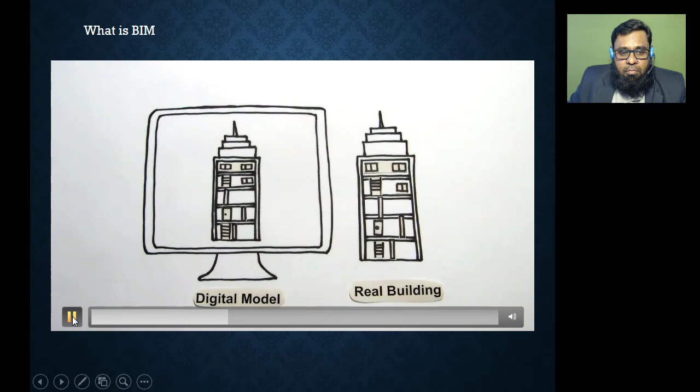The BIM model consists of the virtual equivalents of the actual building sections used to create a building. These intelligent elements are the digital prototype of the physical building elements such as walls, columns, windows, doors, stairs, etc., that allow us to simulate the building and understand its behavior before the actual construction begins. Now let's see what a BIM model can be useful for.

3D. So the first option in BIM is 3D visualization. It means if you are dealing with the BIM concept, we are working with a 3D intelligent component. Not just a 3D component, a 3D intelligent component, and that intelligent component can link with other components at the time of design.

Visualization. Of course, the most basic use of a BIM model is for creating realistic visualizations of the planned building. Your BIM model helps your design decisions by comparing various design alternatives and for selling your design to your client, the local community, and other stakeholders as well.

Change management. The next concept in BIM is change management. In BIM, we can say change anywhere will update everywhere. For example, in CAD software we are dealing with different types of drawings, and if you make any changes in the plan, they will not automatically update in the section. But when we are dealing with the BIM concept, for example using Revit MEP, because Revit works on the BIM concept, if we change anything in the plan, it will automatically update in all other views like section, elevation, etc. Why? Because we are working with 3D intelligent components, not drawings like AutoCAD.

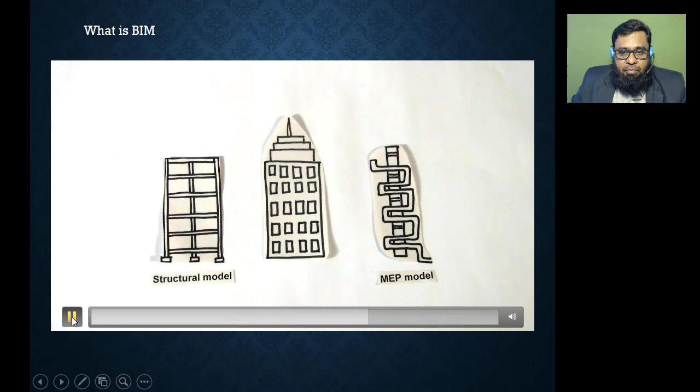Simulation. BIM models contain more than just architectural data. Information about the different engineering disciplines, sustainability information, and other characteristics can be easily simulated well in advance of actual construction.

Data management. The next option is data management, and this option is also very useful in the BIM concept and followed by Revit. For example, if you are doing a material takeoff using a CAD layout, we manually read the drawing and extract the number of diffusers, number of light fixtures, etc. But with BIM, for example using Revit, when we use any component in the project, you will find the entry in the database. Revit works on BIM, and BIM offers a single database, and that information can be extracted in the form of a schedule like an Excel program with 100% accuracy at the time of material takeoff. So this is also one very excellent option offered by BIM and followed by Revit.

BIM contains information that is not visually represented at all. Scheduling information, for example, clarifies the necessary manpower, coordination, and anything that might affect the outcome of the project schedule. Cost is also a part of BIM that allows us to see what the budget or estimated cost of a project might be at any given point in time during the project.

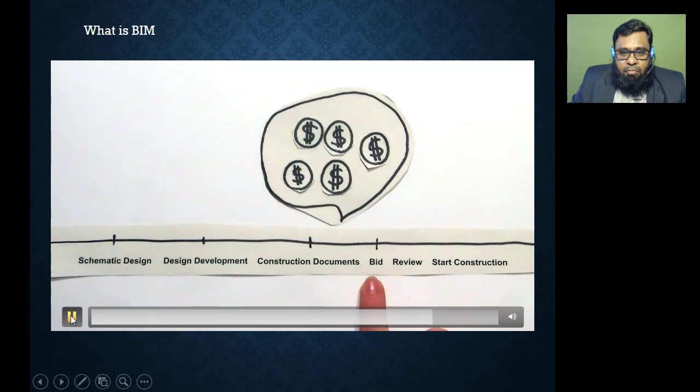Needless to say, the data put in a BIM model is not only useful during the design and construction phase of a building project, but can be used throughout the entire building life cycle, helping to reduce the operation and management costs. So BIM is not a concept just for design. BIM is a concept right from the design till the demolition of the project, including project maintenance, etc. So we can consider BIM a concept for the complete life cycle of the project, including the services.

So remember, BIM is not a software. BIM is a concept for the complete life cycle of the project, right from the design stage till the demolition of the project, including services. And Revit is a software from Autodesk that works on the BIM concept for designing, drawing, material takeoff, modeling, etc. So after learning the concept of BIM, now we are ready to discuss Revit.

As I said at the beginning, Revit is a software from Autodesk, and you all know about Autodesk. AutoCAD is from Autodesk, 3ds Max, a list of software. So this Revit MEP software is also from Autodesk and works on the BIM concept.

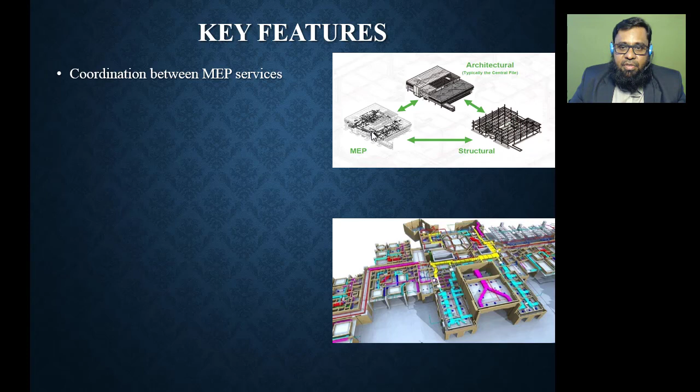Next we'll talk about the special features offered by Revit MEP software. The first is coordination between MEP services. Revit offers coordination between architectural, MEP services and structural, but here we are talking about MEP services. For example, if there is any change in the architectural design at the design stage, one can change the services as per the requirement, or vice versa.

Next, operation of the software is parametric. It means a change anywhere will update everywhere. For example, the equation Q = AV, with Q, the flow rate in the duct, kept constant: if you increase the velocity, automatically the duct size will reduce. So Revit works on a parametric engine. If you change one parameter, the values of related parameters update automatically. And this option is very useful for designing.

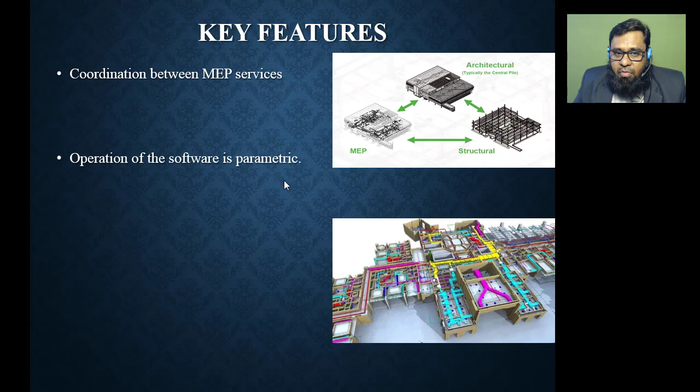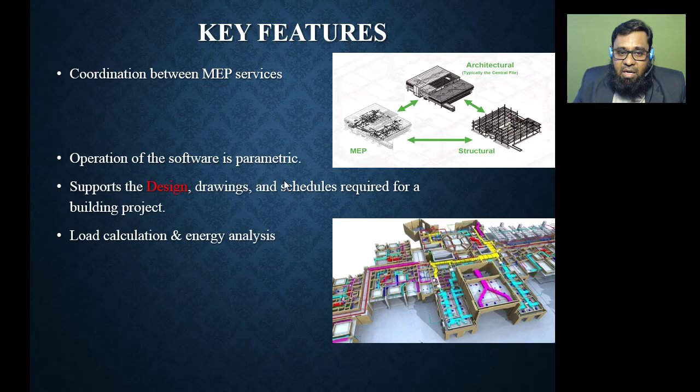Next, Revit supports design. In Revit we can deal with the designing, meaning the calculation part. We can deal with the drawing, very easily and in much less time compared with AutoCAD. And of course we can create the schedules required for the building project for material takeoff. The next option is load calculation and energy analysis, in a very advanced way with less effort.

Next, duct and pipe designing. We don't require a separate duct sizer or pipe sizer, because Revit offers tools for duct and pipe sizing as per the required methods, like the equal friction method, static regain method or velocity method. Even for piping you can use the velocity method or combined velocity plus friction, etc. So no additional duct sizer or pipe sizer is required. You can use the inbuilt option within the software.

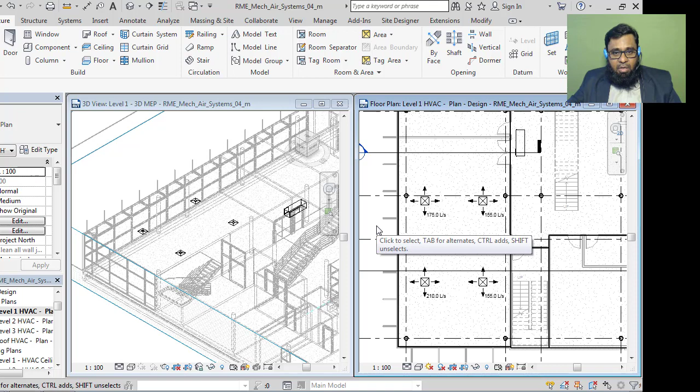Next, one more very useful feature: auto layout of ducting and piping. I'll show you an example directly in the software. In Revit, logical connection is required before dealing with the physical connection, and this auto routing option helps get different possible routes for ducting as well as piping. When I click this diffuser, I use the tool called Generate Layout, which appears only after completing the logical connection. I already completed the logical connection for this area to show the option.

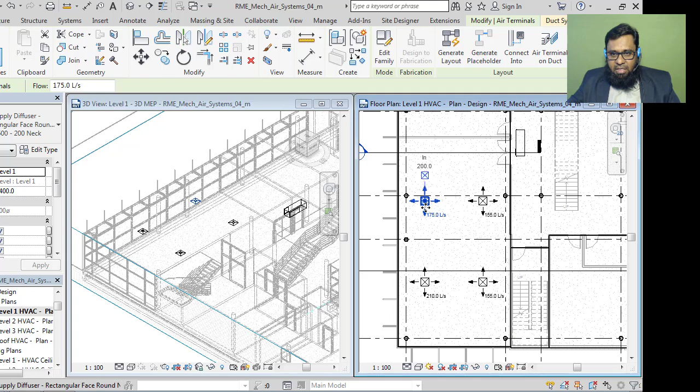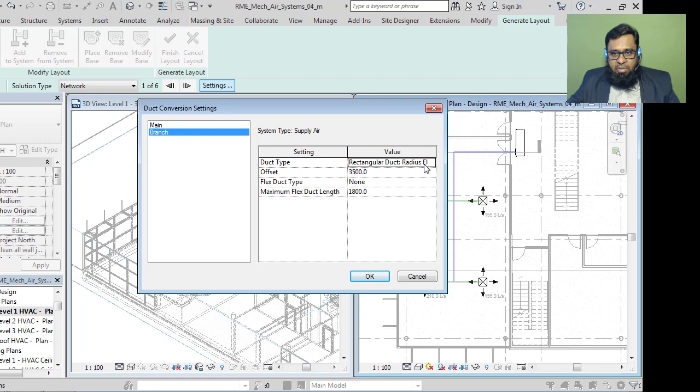So click this diffuser, go to Generate Layout, and here we'll set some settings, say 3500 for the duct offset, same here, and we'll also select the type of duct. For example, I'm using rectangular duct types, and the same option for the branch.

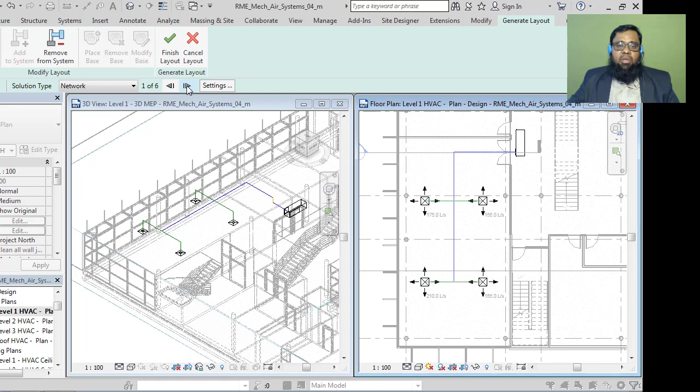And after this, here we can go for the different options. You see 1 of 6 solutions. So 1 of 6 is straight and turn with the branches, and the second option in this way. So like this, whichever is best as per the site condition or as per your experience, we can click finish to convert this into duct. So this is also a very useful option to save a lot of time, to get the auto routing for the ducting and auto routing for the piping.

Next option, logical and physical system. So in Revit, first we'll create the logical connection, then the physical connection. For example, we'll create the logical connection between the light fixtures and lighting panel, and then only you can deal with the wiring, and the load will update in the panel. In the same way, for mechanical services, we'll create the logical connection between the diffusers and AHU, then we'll deal with the ducting, then only the duct sizing can be done.

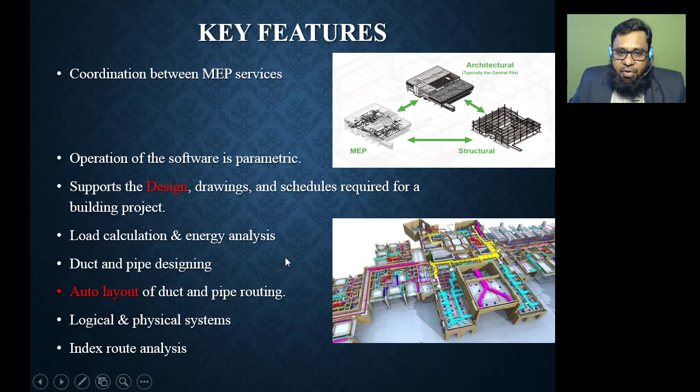Next, index route analysis, and this is also a very useful tool, especially to select the fan and the pump. Most engineers, at the time of selecting the fan and pump, finding the index route, especially for a big project, is sometimes very time consuming and a lot of confusion. But in Revit, after placing the equipment and physical connection, easily with the tool called system inspector, we can find out the index route, so that we can find out the total pressure drop to select the fan and to select the pump.

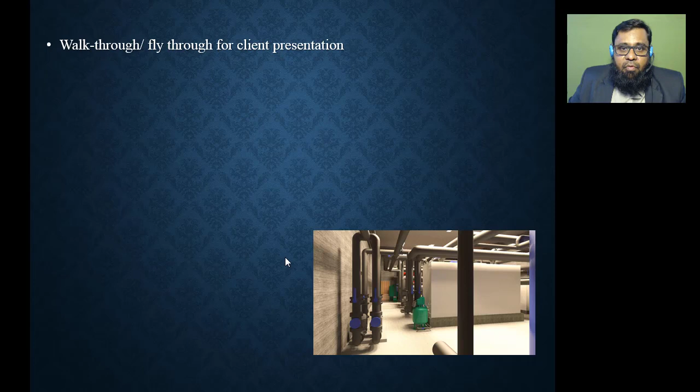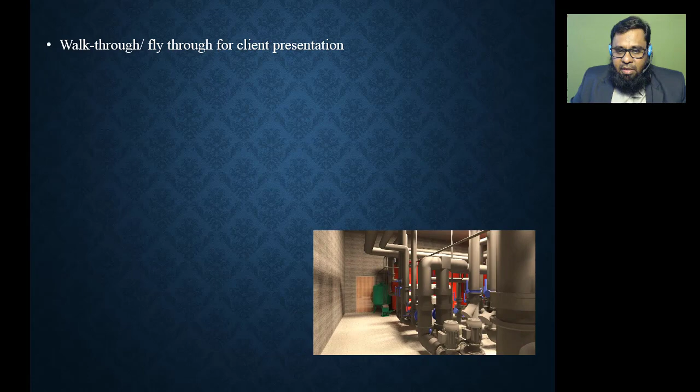Next, we have walkthrough and fly through for client presentation. So here I attach one example, so here you can have a look. This example is a walkthrough for client presentation. This is like a real system, but this can be prepared with very little effort in Revit. After completing all this equipment, we have a tool called walkthrough, and using that walkthrough tool you can create an animation like this for client presentation.

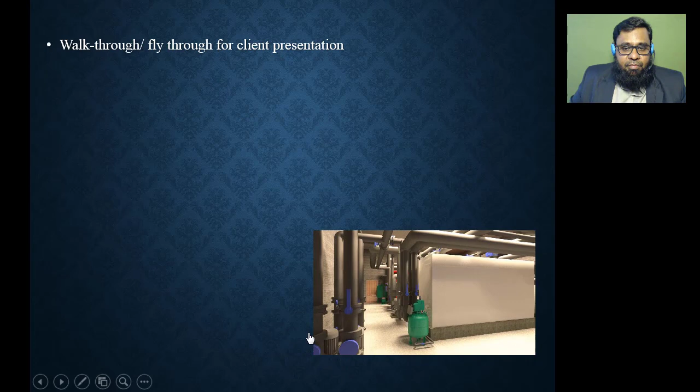Next, all 3D views, 3D modeling. So in Revit we are working with 3D intelligent components. We are dealing with all modeling, and no doubt we can go for the drawing also, but Revit basically means we are dealing with the modeling of the components, like piping modeling, ducting modeling, and other component modeling for the MEP side. And if you talk about the architectural side also, we are dealing with the 3D intelligent building. And as a mechanical or electrical engineer, when we start our service, we are going to link a 3D intelligent building which is prepared in Revit Architecture.

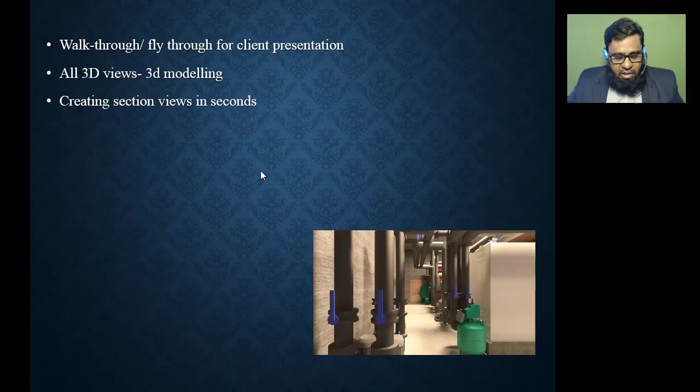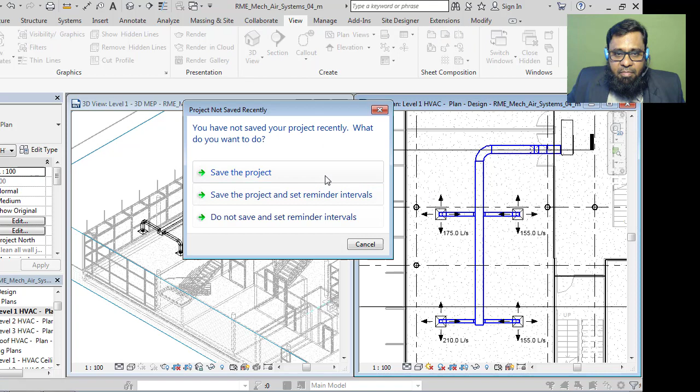Next, creating section views in seconds. So here I'll show you one example. For example, after completing this ducting, if I want to create a section for this area, simply we'll create a slice by using the section tool, and you'll get the section. So this is very easy. So here I'm going to click on this View tab, and from this Create panel I'm using the tool Section, and simply I'm going to create the slice like this. And when you do this, automatically the software will create the section for this area. But how to access it? Simply double click this and you can access it.

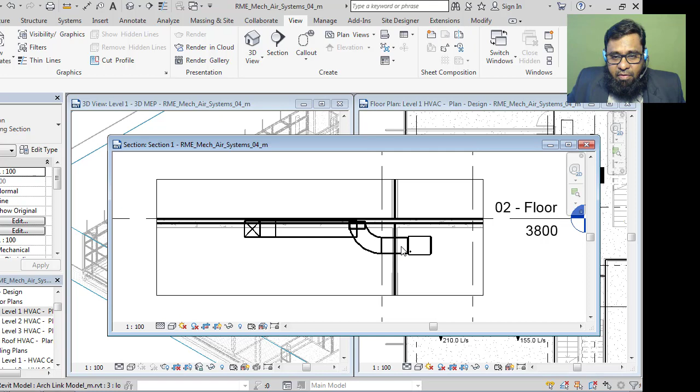And now it is in single line view because of the settings. For example, if I click Fine, you can have a look with the 3D view also. And later if I add or remove anything in this area, automatically the section also gets updated. For example, if I select this equipment and delete it, it will delete from the section also. Or else if I select this duct and delete it from the section, it will delete from the plan view. So in Revit we are working with multiple views of the same component. So we are dealing with the modeling, we are not working with drawings.

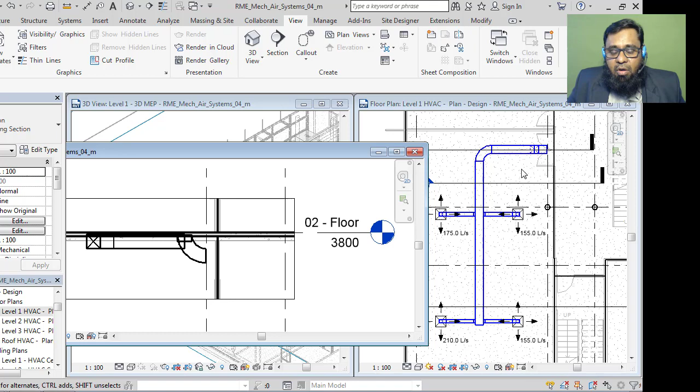Next, plumbing and firefighting design can be done. Lighting load and power load calculation for the electrical side, and finally detailing, documentation, and annotation for the shop drawing. And no doubt at the end we can also create the families, meaning modeling components, like creating the fittings for pipe, creating the fittings for ducting, and if any new component is required which is not available in the software, that can be created in a separate family editor, and that we call families. So families refers to 3D intelligent components, the components we are going to use in the project.

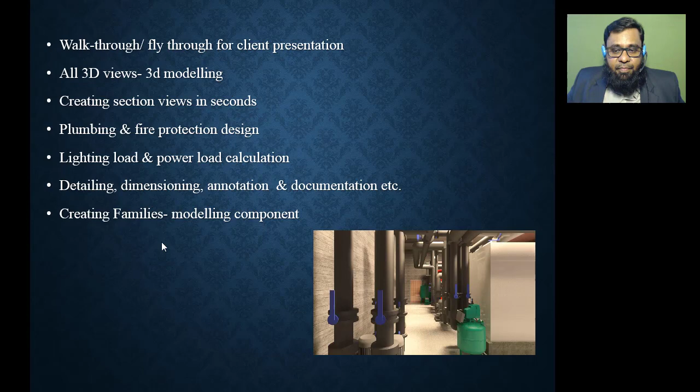Okay, so next we'll talk about the training details. Here the prerequisite to attend this program is you should have basic knowledge of MEP design, and the system configuration to run this software, whether you are using a PC or a laptop. So the recommended processor is i3 or above, and RAM 4 GB minimum, and 8 GB is recommended. And if you have minimum 5 GB hard disk space, you can install the software. And I recommend using Windows 7 64-bit, because 32-bit is not applicable in the latest version; if you talk about the 2018 version, 32-bit is not applicable. You should have a minimum 64-bit operating system.

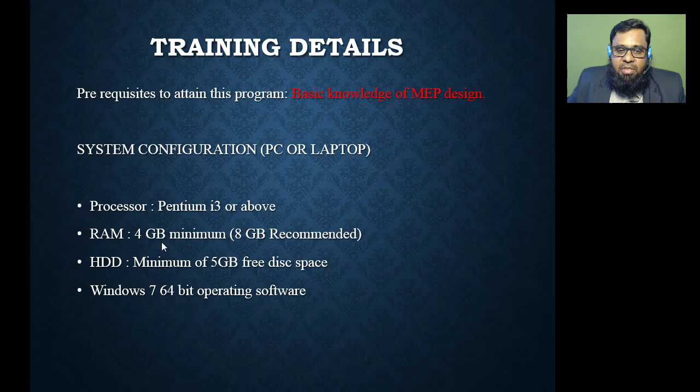Next we'll talk about the syllabus. So if you talk about the Revit MEP syllabus, we are offering it with a project, because learning Revit with a project is important, because many options will activate only in sequence, at the time in between the project when it is required. Many options will not be available. If you search also, it's not available. It will activate only at the time of requirement, as per the sequence and as per the project requirement.

So learning Revit with a project is a must, and we are offering this training with the project in metric as well as in the English system. So the training will end with the project in both systems, and we will also offer the data, material, and a lot of stuff. So we'll talk about the syllabus.

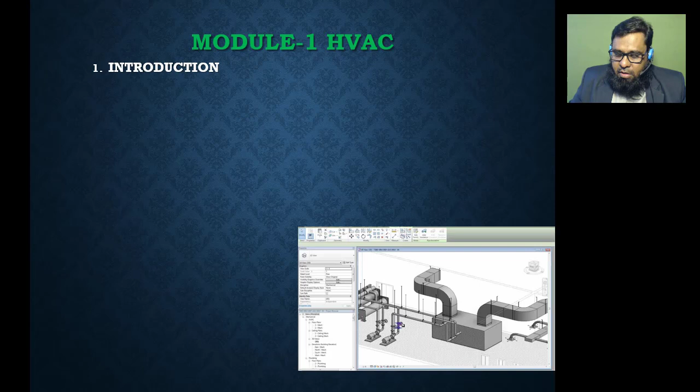Actually this course is divided into 4 modules. Module 1 is HVAC, module 2 is electrical, in module 3 we'll talk about plumbing and firefighting, and module 4 is common for all the services, which includes detailing, documentation, families, etc. So in module 1, we'll start with the introduction, then we'll learn the training file setup. Next we'll talk about modifying the views, then common tasks in chapter 1.

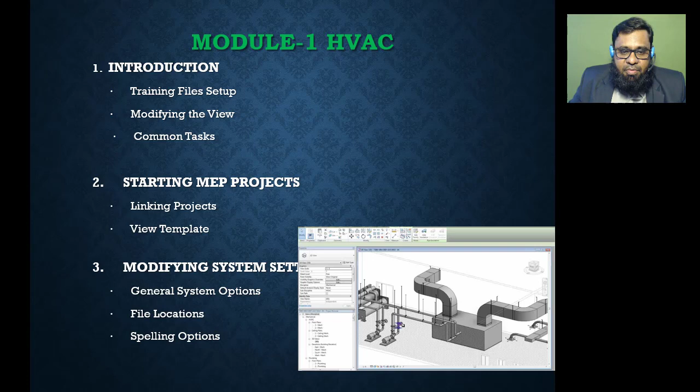In chapter 2 we'll talk about the project: the project settings, how to link the architectural building from the architect to start any service, then view templates including VG, visibility graphics. We'll go for different visibility settings for different services to avoid confusion. Next in chapter 3 we'll talk about modifying system settings, which is again common for all the services, and system settings refers to the software settings, like general system options, file location, spelling, snap, etc.

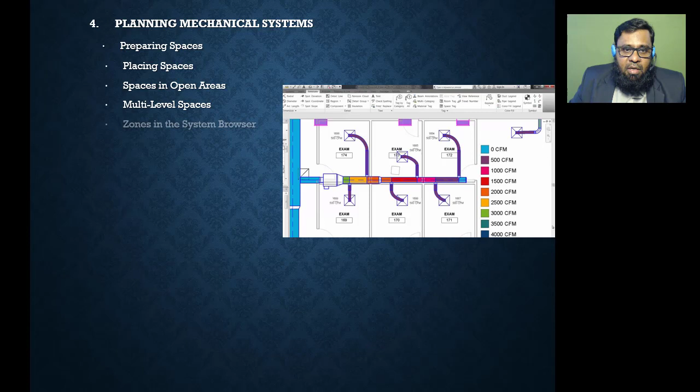Next in chapter 4 we'll talk about planning mechanical systems. So we'll start the HVAC module from chapter 4. Chapters 1, 2 and 3 are common for all the services. In planning mechanical systems we'll learn preparing spaces, the first step in designing for load calculation, and after preparing spaces we have different cases for spaces. Then we'll talk about zoning, and after zoning we'll learn about the analytical model, meaning load calculation settings.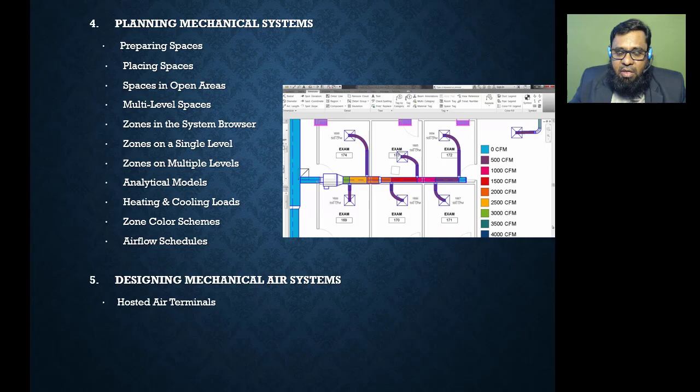Then we'll talk about heating and cooling loads, and heating and cooling load is very easy in Revit, because all the external sources will be automatically analyzed by the software, because we are working with a 3D intelligent building. Next we'll talk about the zone color scheme for presentation and the airflow schedule. Then in chapter 5 we'll talk about the mechanical air system. Chapter 4 is for load calculation, and chapter 5 is for the air system, like placing the AHU, diffusers, hosted air terminals, non-hosted air terminals, duct designing, ductwork, manually creating ductwork, auto routing, etc.

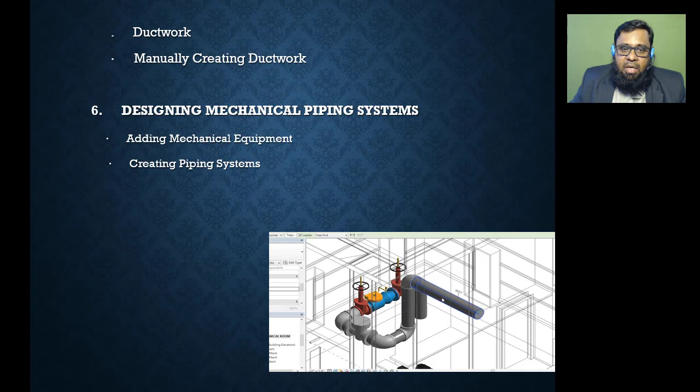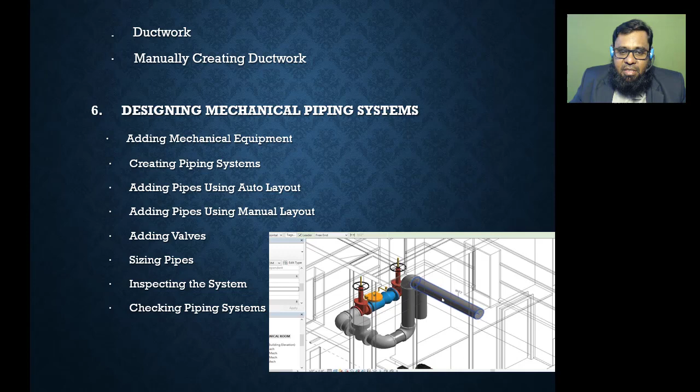Next in chapter 6 we'll talk about the piping system: adding mechanical equipment, then creating the piping system, nothing but logical connection, then adding pipe using auto layout as well as manual layout like ducting, then adding valves, then pipe sizing with the different methods, then finally inspecting the system to get the result, and with inspecting the system you'll also get the critical path index route for pump selection. Next we can also check the system with the different tools.

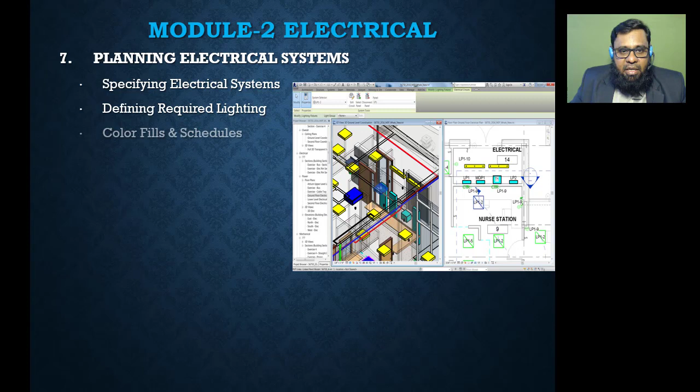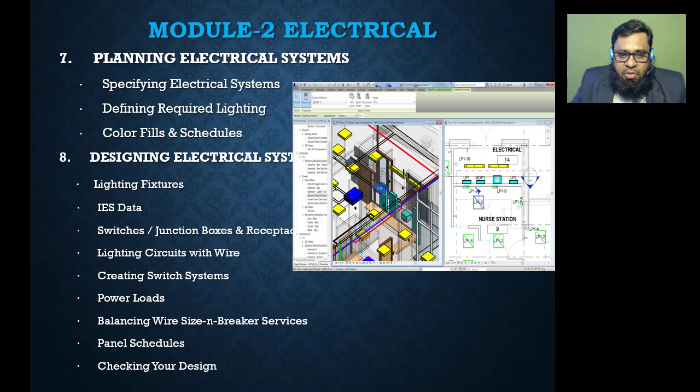Next in module 2 we'll talk about electrical. In electrical, first we'll go for lighting load, then power load, but before this we'll go with the basic settings like specifying the electrical system, defining required lighting, next color fill and schedule for presentation, next designing electrical systems, lighting fixtures, adding the light fixtures, IES, Illuminating Engineering Society data, next adding switches, junction boxes and receptacles, meaning power sockets, lighting circuit with wire. Lighting circuit means again we'll create the logical connection, then creating the switching system, then power loads, balancing, wire size and breaker services, panel schedule, and at the end we'll also learn how to check your design.

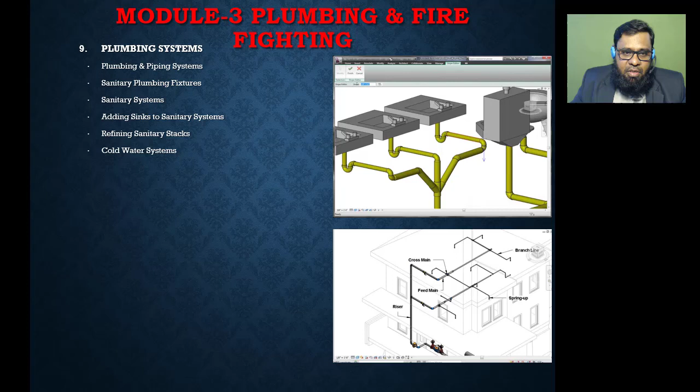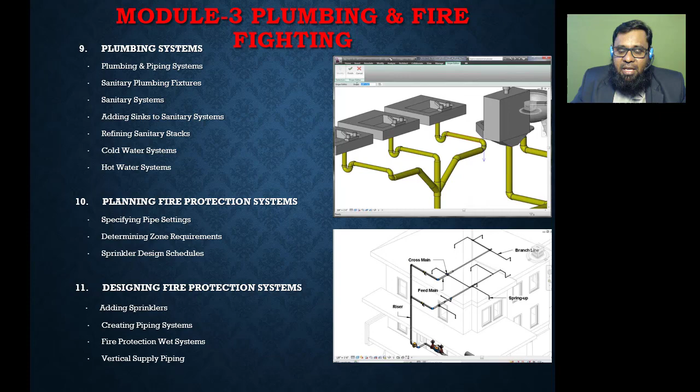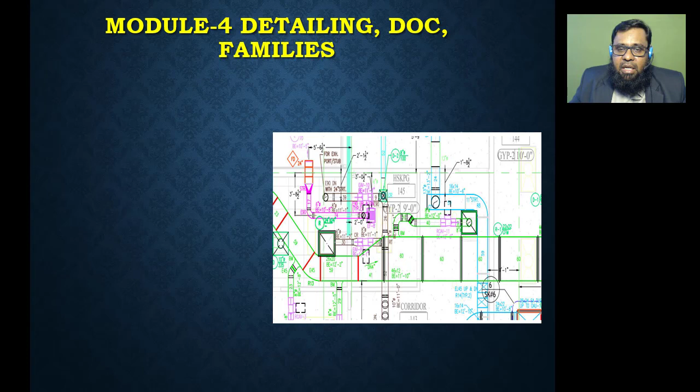Next in module 3, that is plumbing and firefighting. First we'll talk about the plumbing drainage system, then the plumbing water system, then the firefighting sprinkler system. All these topics will be covered in detail with the project in metric as well as in the English system. Here you can have a look at the main topics and subtopics: designing the fire protection system, adding sprinklers, creating the piping system, meaning logical connection, then the fire protection wet system, vertical supply pipe to connect the hose reel, etc. Next, module 4 is common for all the services, and includes detailing, documentation, annotation, dimensions and families.

So in this, creating documentation views, which is important to get before starting the shop drawing, duplicating plan views, creating dependent views. If you are dealing with a big project, then dependent views will help to make a section of that particular view to set in 1:100 scale.

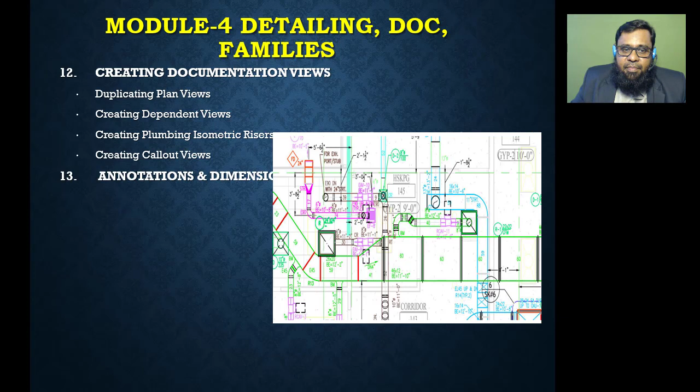Next, creating plumbing isometric risers, creating callout views, which is common for different services. Next, annotations and dimensions, which is also required for all the services. Next, detailing, model based riser diagram for electrical, then creating wiring, model based isometric for ducting, including ducting, then detailed

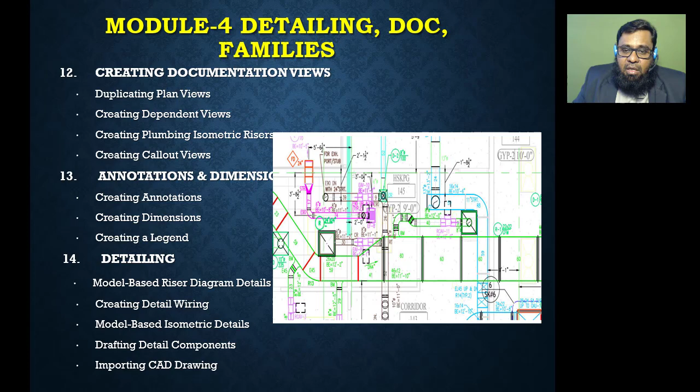drafting components. So in Revit we have a separate view even for drafting also, and at the time of modeling, when you change the view, the plan view, you'll get the plan view, but if you want, you can go for only drawings. For that we have a separate drafting view. Next, if you already have the completed drawings in CAD, we can also import from CAD. So this is not the end.

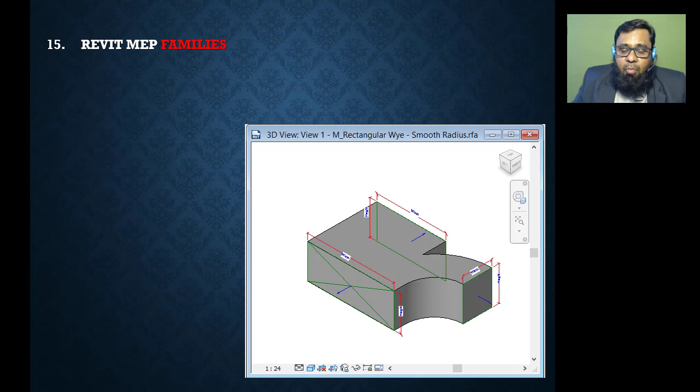So here we'll talk about Revit MEP families, which is also an important topic. So working with the 3D intelligent component like solid modeling, like ProE, CATIA, ANSYS, etc. So in Revit also we are dealing with the modeling of the different components, and that component can be used at the time of project for different services. So fan families, then VAV box, electrical equipment families, then toilet families means plumbing fixture families, flange families, etc.